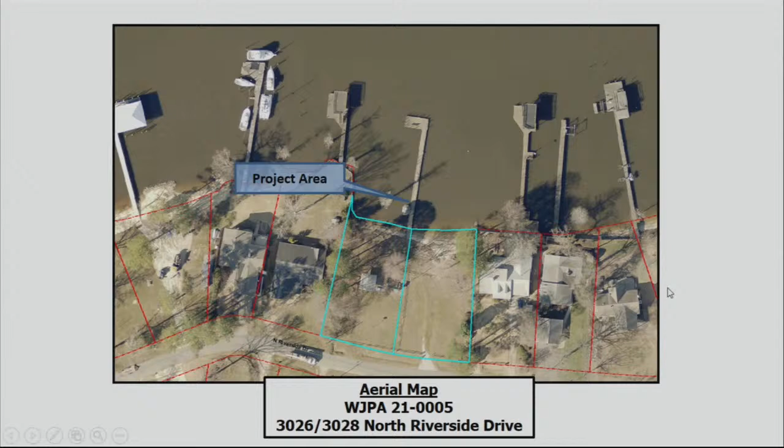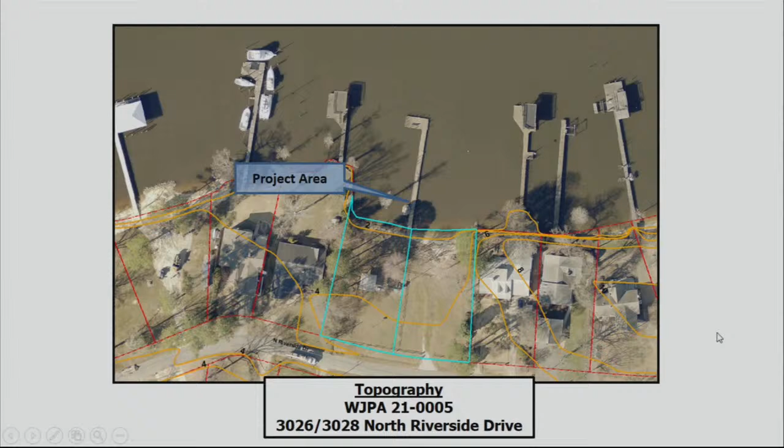Aerial photography of the site shows the existing pier that is underwater for the majority of high tide events. Topography shows the site is fairly flat, with the pier extending into the Chickahominy River, and the floodplain affects this portion of the property.

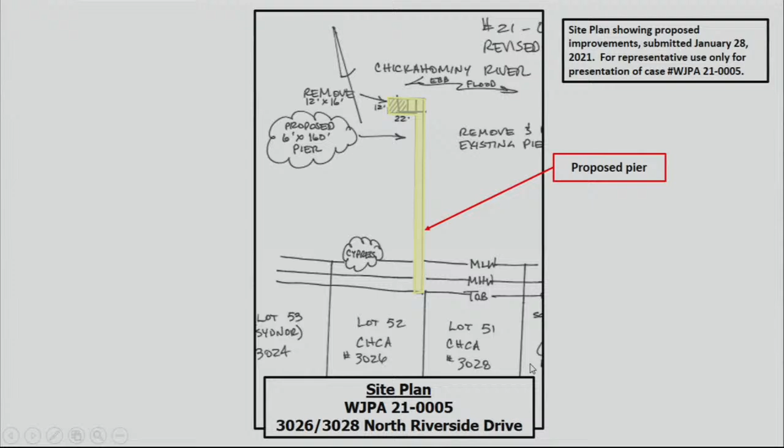A site plan indicating the above proposed construction is shown in yellow, along with site photographs showing the need for reconstruction of the pier, as it is underwater in these photos.

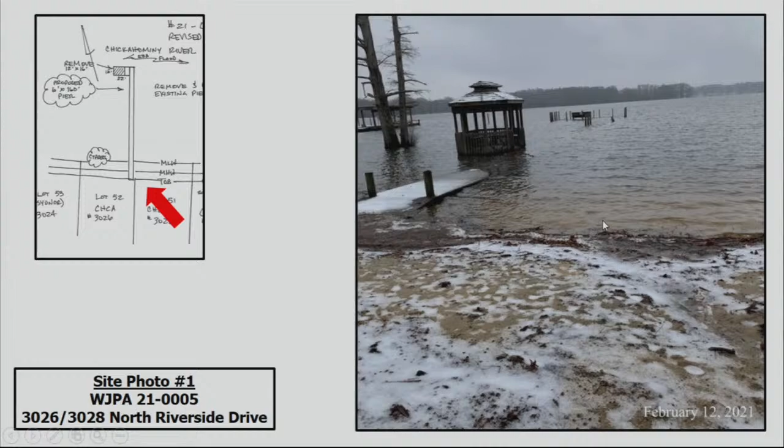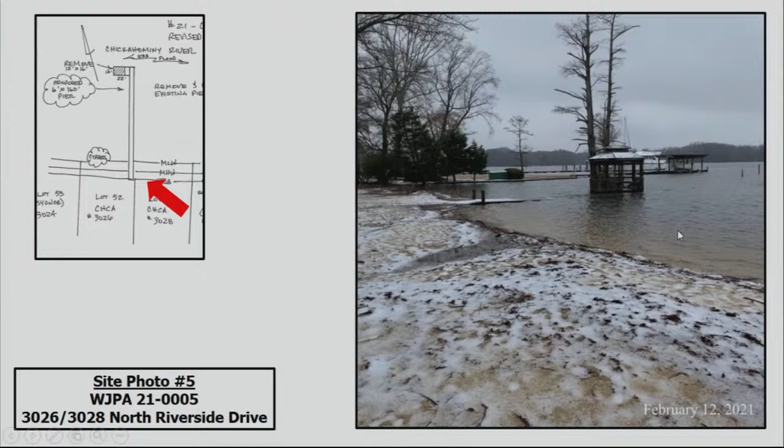Staff recommends approval, given that the applicant obtains all other necessary local, state, and/or federal permits as required for this project, and that all development activities located in the special flood hazard area comply with Article 6, Division 3, floodplain area regulations of the James City County zoning ordinance, and receive all required approvals and permits prior to the commencement of such activities.

This wetland permit will become null and void if not started by April 14th, 2025, with a written request for an extension to be submitted to the James City County Stormwater and Resource Protection Division no later than March 3rd, 2025, which is six weeks prior to the expiration date. Thank you, and I'd be happy to answer any questions.

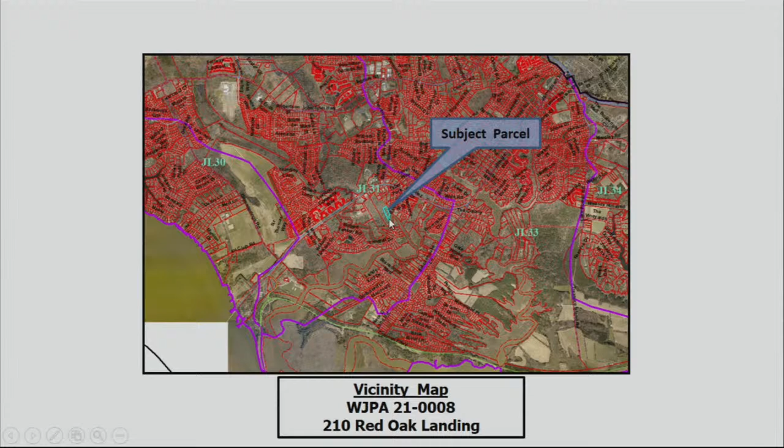I do want to direct your attention to your screen. Their request is to construct a pier on Powhatan Creek of approximately 230 feet in length. The subject property at 210 Red Oak Landing is outlined here in blue. From the aerial map, the area in question tidal vegetation is here, and the upland bank starts about here. The house was built prior to the Chesapeake Bay Preservation Ordinance and is grandfathered into the Chesapeake Bay Act, just for your information.

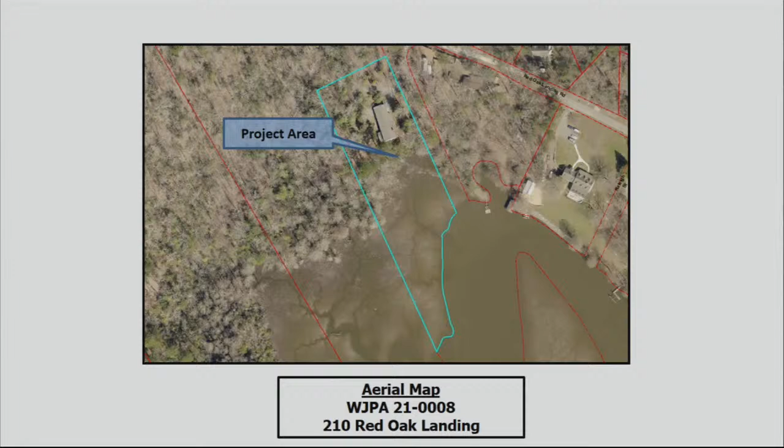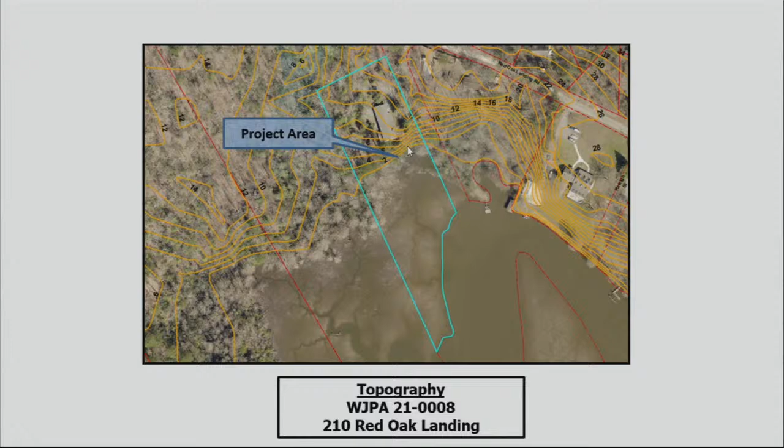Topography as it exists on this site. Again, the toe of the bank, or the edge of marsh, depending on which way you think of it, is here. And the floodplain as it affects the property.

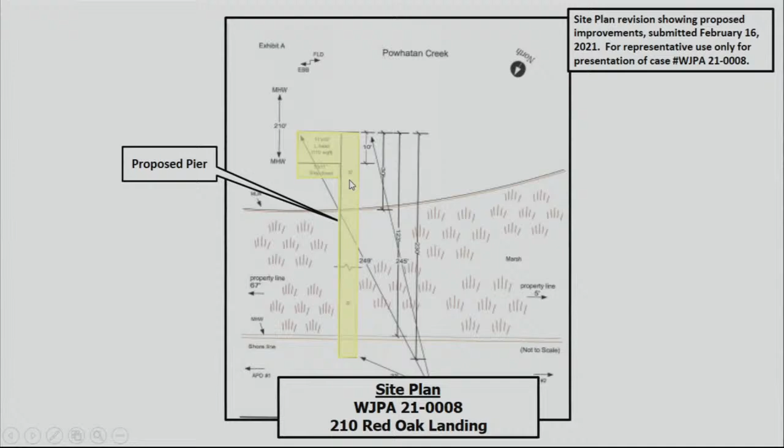From the application, starting at the uplands and then traversing approximately 200 feet of vegetated marsh, and then from the edge of the marsh, projecting out into Powhatan Creek proper approximately 30 feet with an 11 by 20 L-head here, and then a little 5 by 11 step-down platform here to access the creek with canoes and those types of issues. So from the property looking out towards Powhatan Creek, the pier is going to start here approximately and cross. What you can see here is just a mud flat, but it is a peltandra marsh.

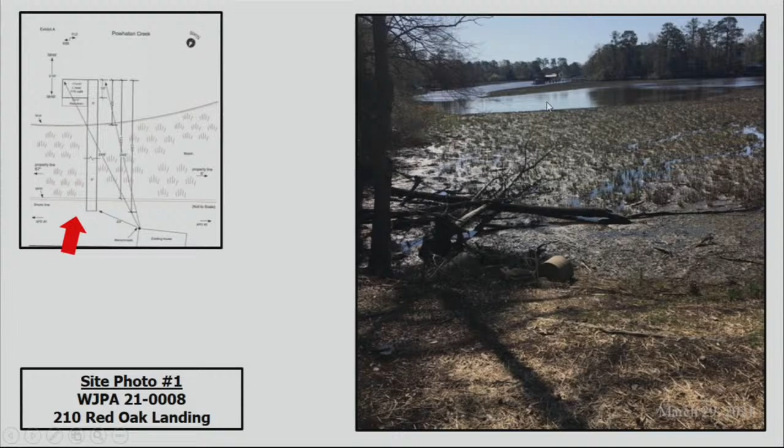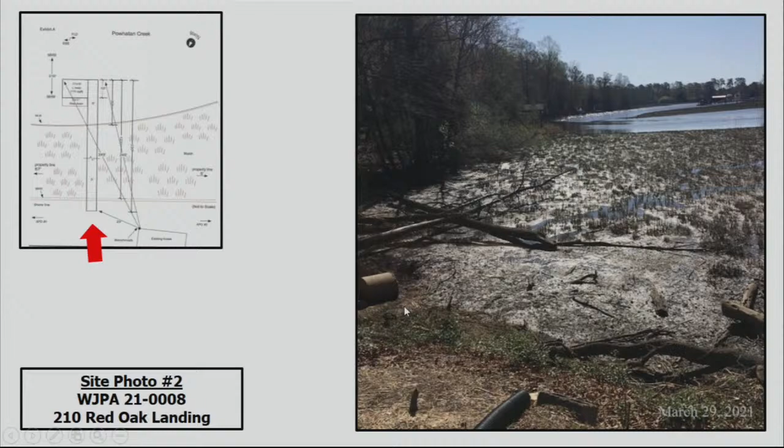And here in the next month or two, it'll be nice and purple with all the flowers. The pier proper will extend out into the creek, approximately where my cursor is. Different perspective, a little further, pier's going this way. And again, from the other property line, the pier's going like that.

Again, it is not the pier construction itself. It is a private single user open pile structure, which is clearly exempt from the Wetlands Board jurisdiction, but it is the manner of construction of the pier that is under the board's purview tonight.

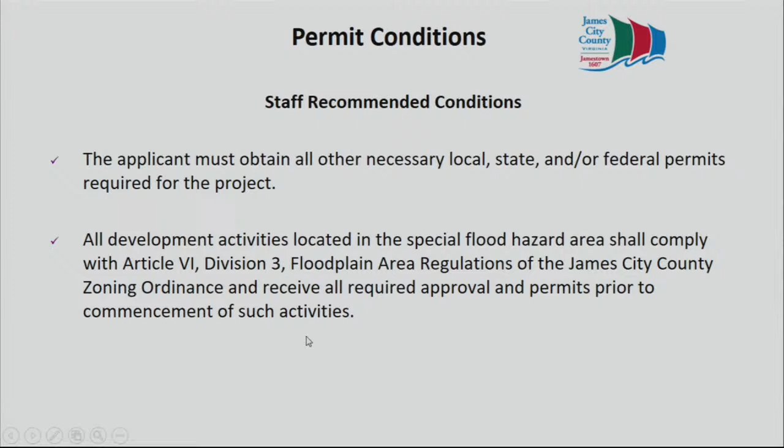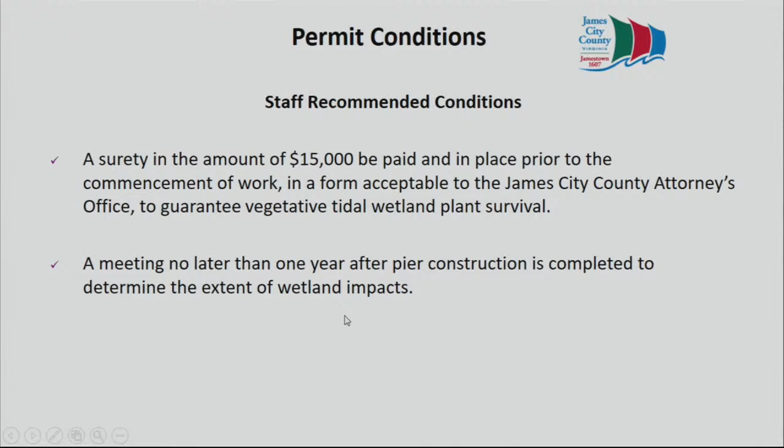Staff, as I said previously, does recommend approval with the following conditions: that the applicant obtain any other necessary permits as required, that the development comply with the floodplain regulations of James City County, that a $15,000 surety be paid to guarantee no net loss of tidal wetland vegetation, that a meeting take place no later than 1 year post-construction to determine if there are any wetland impacts, and that the wetlands permit expire 3 years from tonight's date, with an extension requested 6 weeks prior to that expiration date. Be happy to answer any questions the board may have regarding this application.

David, do you have any questions? No. Bob? Yes, just some fill-in information, I guess. Do you have some idea of the estimate of time the construction will take once they get started? Mr. Lukens, I will defer to the contractor for that question. I do believe he is online as well and can answer that. Any other questions? Not for me.

I have one, sir. Do you consider, if this site becomes infested with Phragmites, do you consider that the destruction of the wetlands?

That's a difficult question to answer. I don't mean to be springing it on you cold like this, but it occurred to me a little while ago that in a situation like this, I would certainly hope that the staff would think that this is one place where you could eradicate Phragmites if it becomes established. I don't see any Phragmites in the slides anywhere, and you know the problem you could get into, but this could certainly be something that you could control and get the native vegetation back.

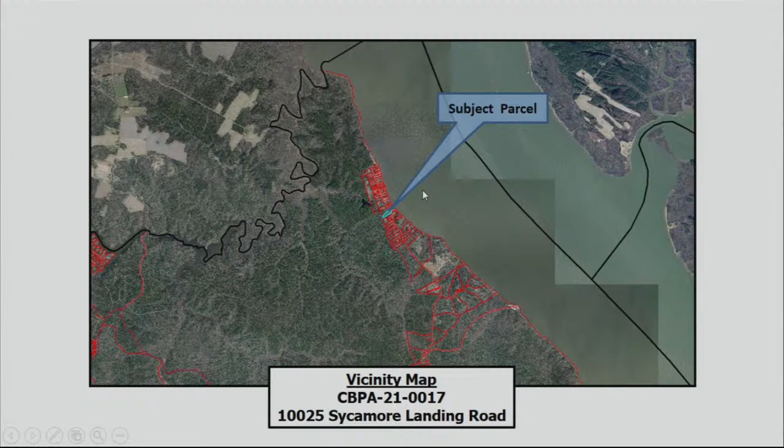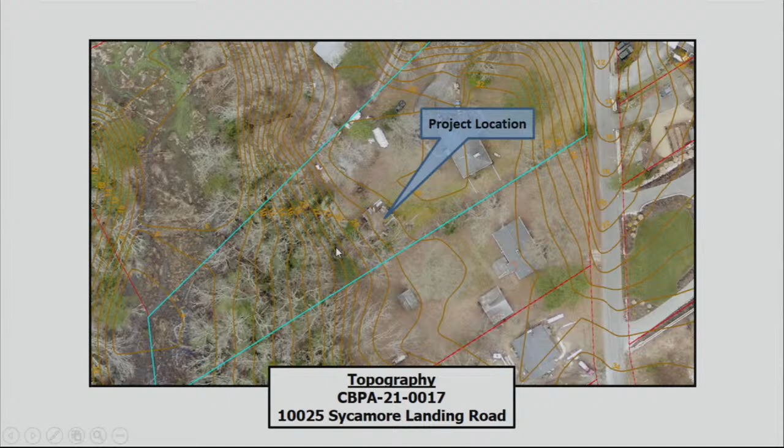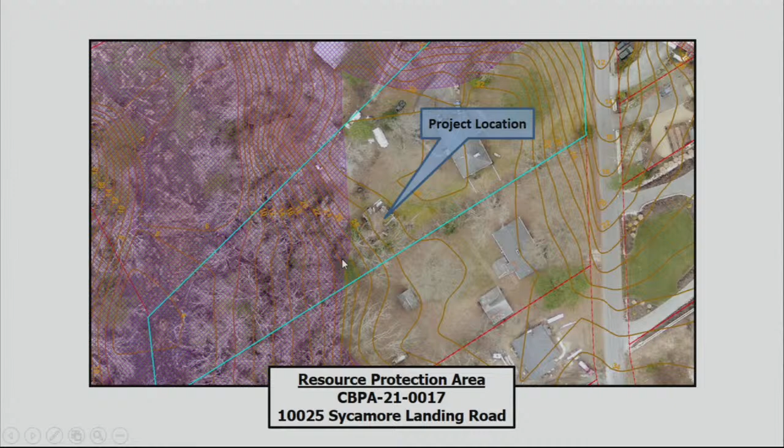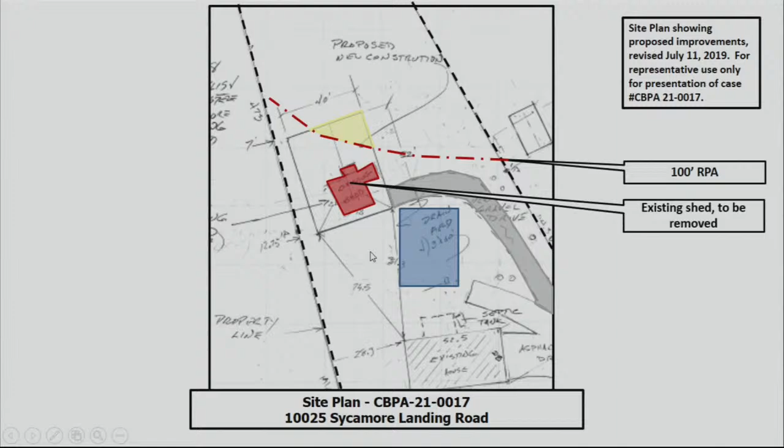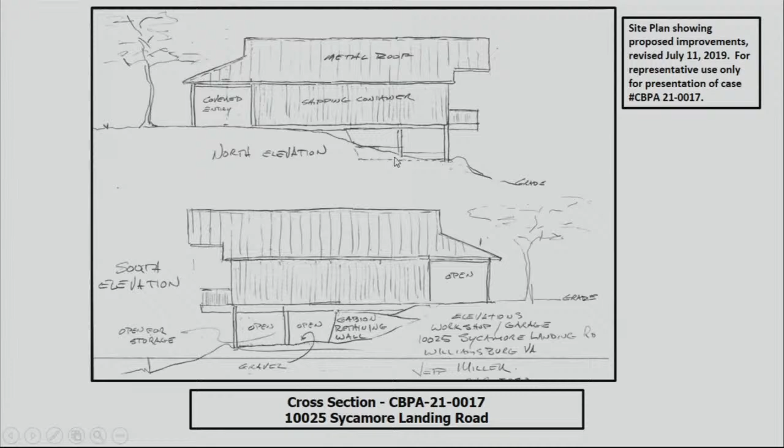The driveway would be accessed through this way, and from the other side, the gabion wall here. This is the area of gravel mentioned previously. From another plan view section, the roof line would capture runoff via an infiltration trench at ground level, capturing all the runoff coming from the rooftop.

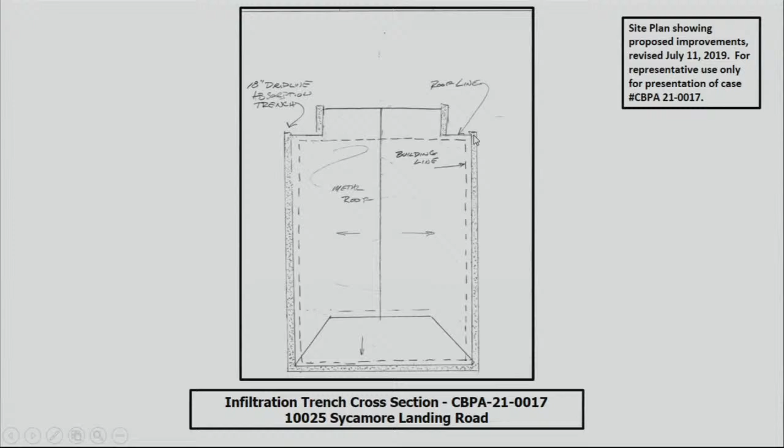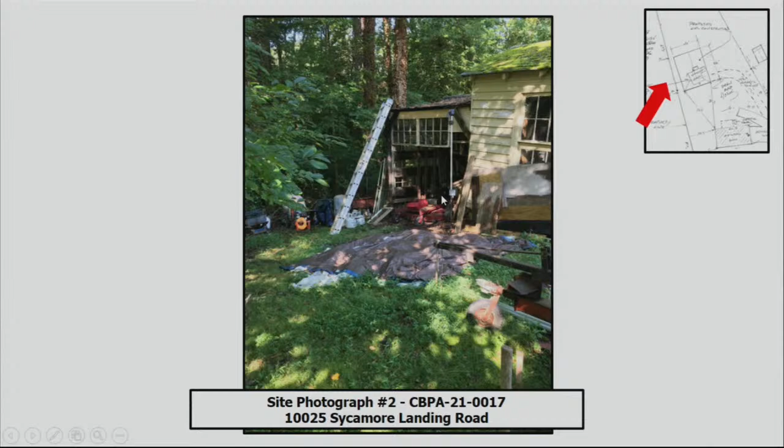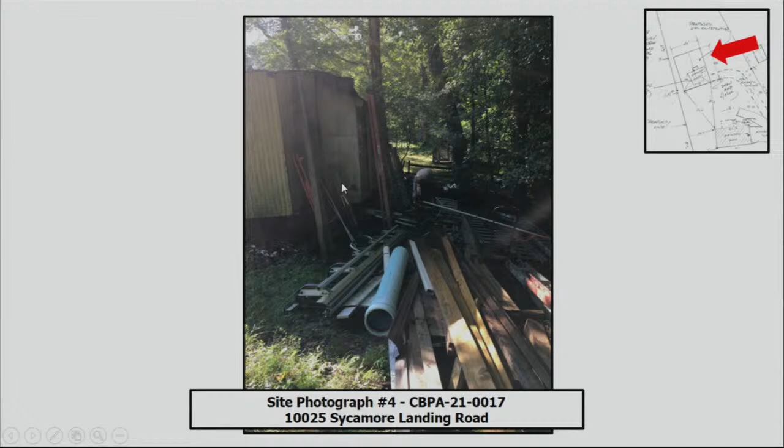This is the existing shed on the property, which will be demolished, and all the material on the ground and within the shed would be stored inside the proposed new garage. Staff does recommend approval and notes that the impacts are minor.

We request the following permit conditions: any other federal, state, and local permits including an erosion sediment control plan and land disturbing permit; submit a design for the proposed infiltration meeting Virginia Stormwater BMP Clearinghouse Design Specification Number 8; that the request become null and void if construction is not begun by April 14, 2022, with extension requests due no later than 6 weeks prior, March 3rd, 2022. Happy to answer any questions the board may have.

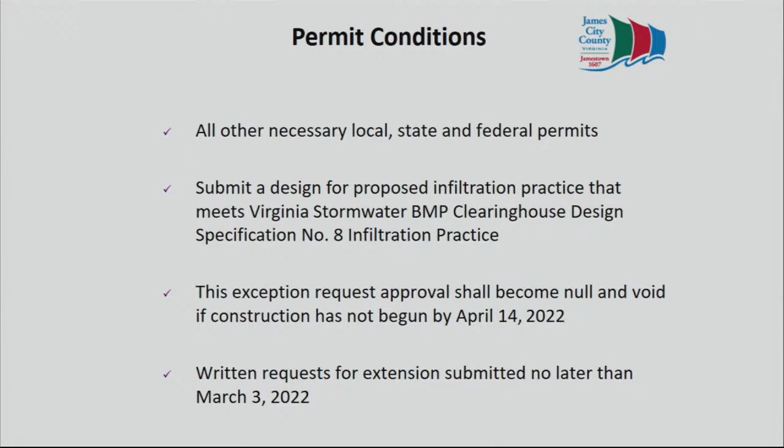Any questions for staff? Mr. Lukens? Mr. Gussman? No. None, sir. Hearing none, we will open the public hearing. Does anyone wish to address the board on this matter?

My name is Jeffrey Miller. I am the owner, builder, contractor, designer, et cetera. State your address for the record. Jeffrey Miller, 10025 Sycamore Landing Road.

Hearing me again, I want to offer apologies to the board. Crazy year. Yeah, projects - my son lives right next door, he has a new room addition on his house, and a new addition to his family, and another one on the way. That took precedence. Good, I appreciate your indulgence, hope everything will go better.

Would this time frame that Mr. Wilson suggested in the permit give you sufficient time to start construction? I believe so. Okay, thank you.

Any other questions? No. Anyone else wish to speak on this matter? Hearing none, I will close the public hearing. The matter is before the board.

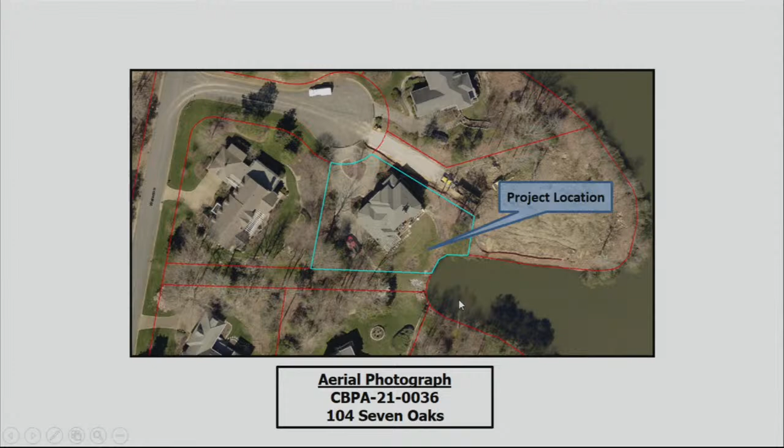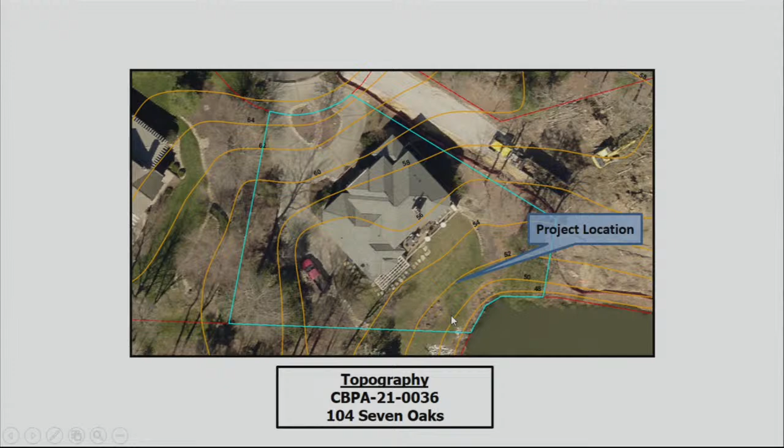Topography of the lot does slope back down towards the resource and does get steeper towards the rear of the property. Sanitary sewer runs adjacent to the property lines. And the resource protection area as it affects this property, encompassing the majority of the existing house.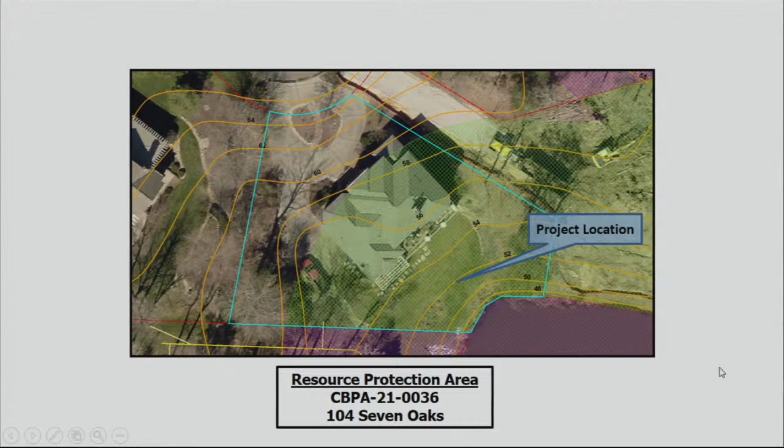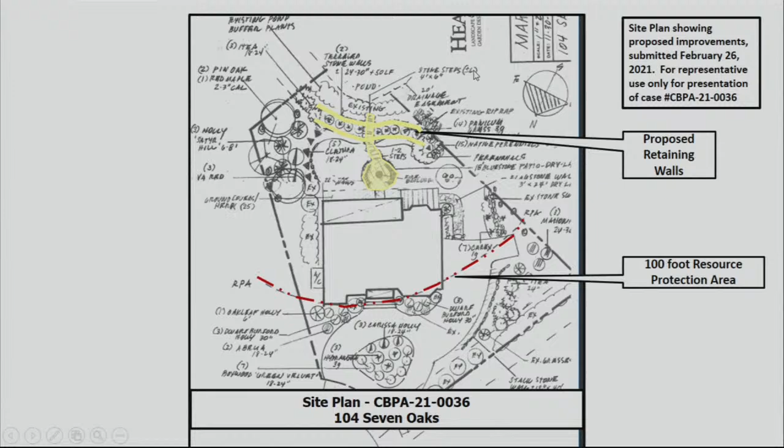Site plan that has been submitted to this department, the resource protection area outlined here in red. The proposed retaining walls here with the pond just adjacent to them, and the proposed patio circling it.

Again, staff does recommend approval of this exception request, given that all other necessary local, state, and federal permits are acquired as necessary. That a surety of $250 be submitted to guarantee the mitigation plantings, and this exception request approval become null and void if construction is not begun by April 14th, 2022, with written request for an extension submitted no later than March 3rd, 2022, 6 weeks prior to the expiration date of this exception request. Thank you, happy to answer any questions the board may have at this time.

Any questions of staff? Just a quick one. You said 2 retaining walls? Yes, sir. So they're parallel to one another? Yes, they will be parallel. They basically just step down the topography. The first one, like each a foot? What's the step down? I am not positive of the elevation change, but I will defer that question to the applicant.

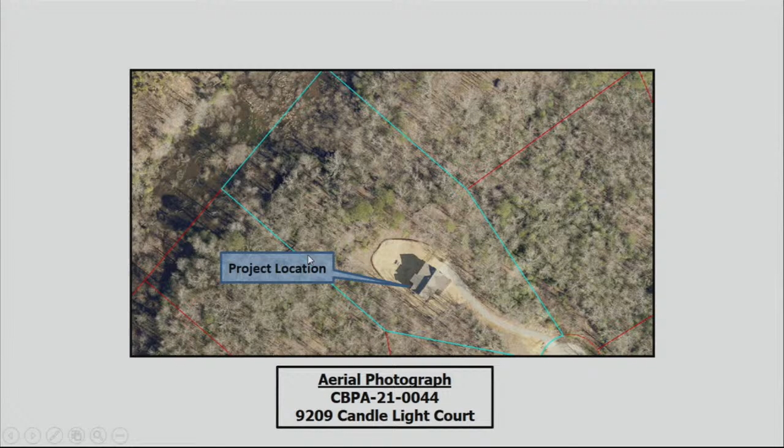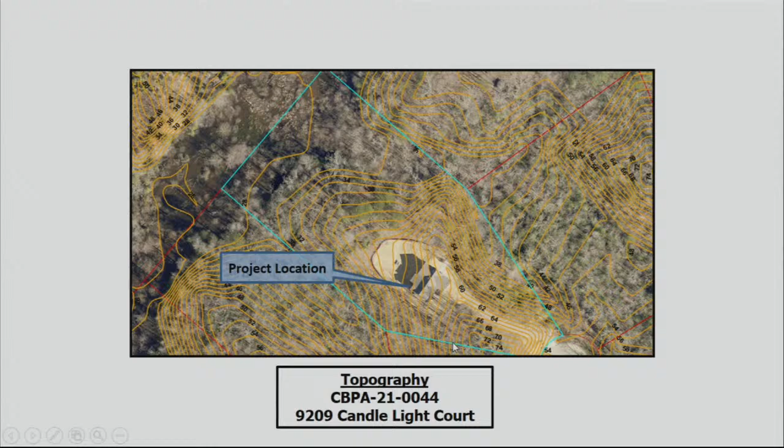Topography as it affects this site, it is heavily constrained by steeper slopes and does have a small island of a flat area towards the middle. The resource protection area as it affects this property, outlined here in green and orange, the area outside of the RPA coming up through the middle of the house.

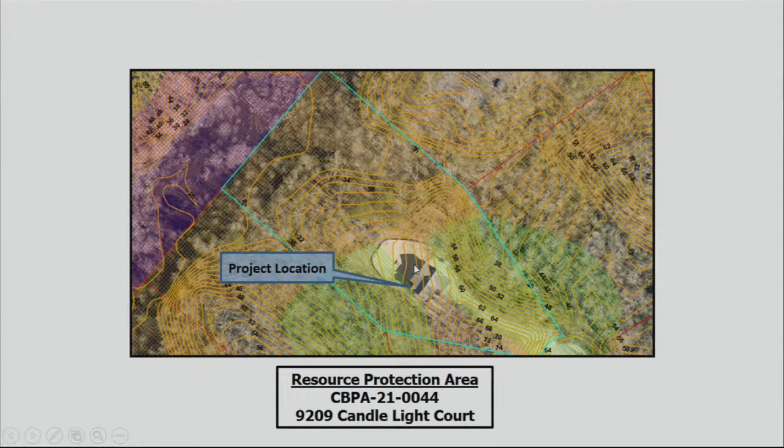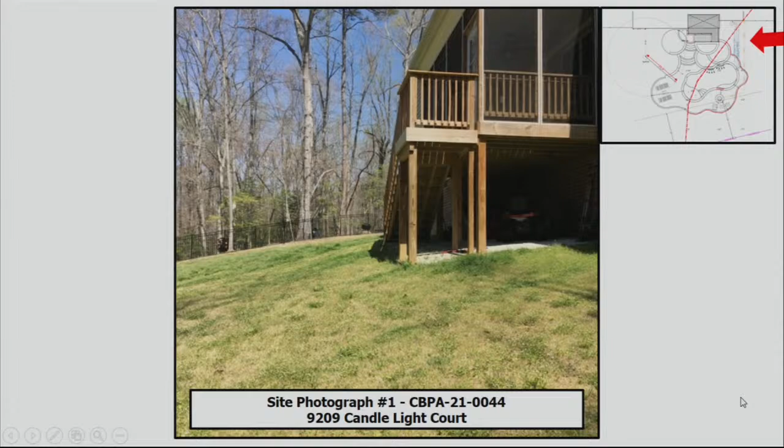Staff does recommend approval of this application request, given that all other necessary local, state, and federal permits are acquired, including an erosion sediment control plan, a land disturbing permit, and a surety. That a mitigation plan consisting of 2 canopy trees, 4 understory trees, and 6 shrubs be submitted to this office. That a surety of $500 to guarantee the mitigation plan is also submitted. And that this exception request approval become null and void if construction is not begun by April 14th, 2022, with written request for an extension submitted no later than March 3rd, 2022, 6 weeks prior to the expiration date of this approval. Thank you very much for your time.

I'd be happy to answer any questions that the board may have at this time. Mr. Long, is the encroachment outside of the footprint of the pool, is that pavers, patio, what is that? It's my understanding that they will be patio.

Concrete? Yes, though I will defer that question to the applicant to further answer. So the pool up there, is that peanut-looking shaped? Yes, it is this shape here, with everything else around it being the patio area. Everything is within the yard, is that correct? It is all within the yard, yes, sir.

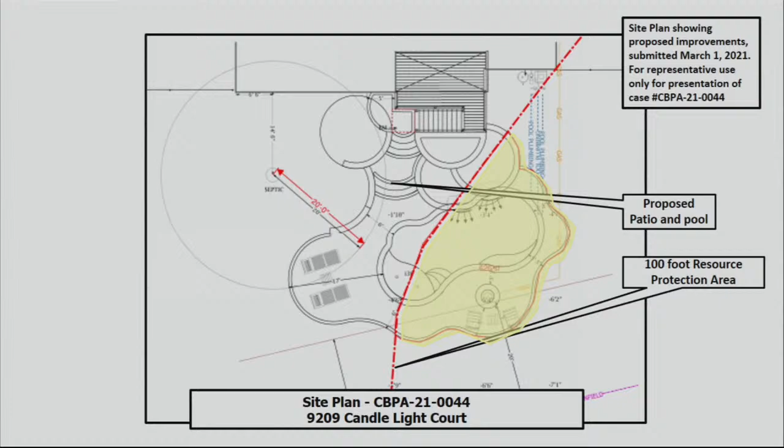Thank you very much. Are there any other questions of the applicant? Thank you. Thank you. Would anybody else like to speak on this case? Hearing none, we'll close the public hearing.

Open for board discussion. I can appreciate Mr. Wilson's comment about the potential implications of infiltration next to a drain field. Still think this is a lot of impervious in the buffer. I would have appreciated that been addressed more directly in the application, just throwing it out there. Comments well taken, sir. And I also share the view that it would have been good to have some infiltration there, but that the drain field, I think, pretty much negates anything we could do there. So I'm prepared to vote for this, sir.

Mr. Gussman, Mr. Lukens, any comments?

No comment. All right, I'm open for a motion.

Mr. Chairman, I'd like to make a motion that the board vote to adopt CBPA-21-0044, Candlelight Court Pool. We have a motion on the floor to adopt the resolution to grant the exception.

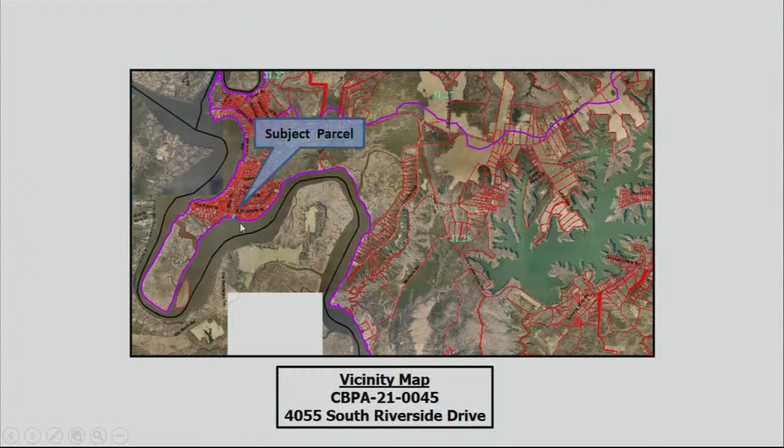Brief presentation above. Again, the applicant requests to construct a house addition on property located at 4055 South Riverside Drive, outlined here in blue within the Chickahominy Haven subdivision. Aerial photography showing the house in question and the area for the expansion.

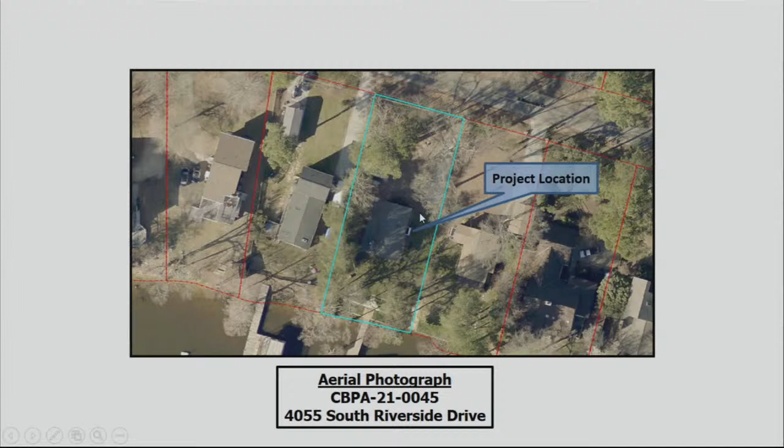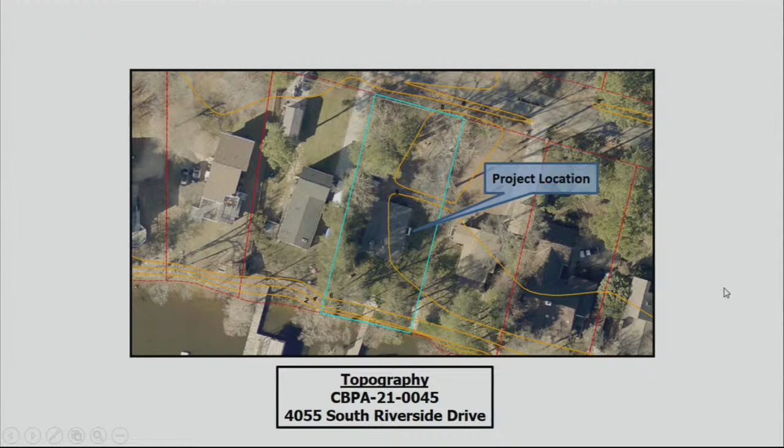Expansion is on the side of the house? Yes, sir. It's going to be on both sides of the house, and on the front of the house, facing towards the road. So it'll go outwards and forwards. Nothing towards the river? That's correct, yes, sir. Nothing towards the river, all outwards and forwards towards the road. The floodplain, as it affects this property, is heavily constrained.

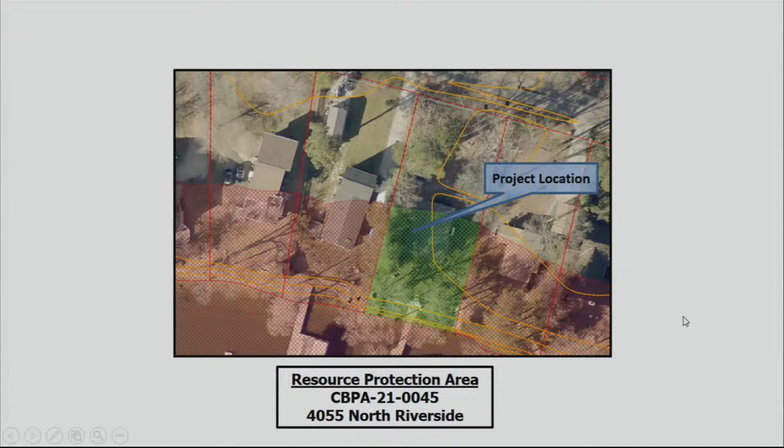And the resource protection area affecting this lot, half the lot does get encapsulated by the RPA. There should be a site plan, but it seems to have been removed. In the right-hand corner, the site plan shows there is an increase of impervious area on the sides of the house and coming towards the road. Some photos from the site show the area of increased impervious area and the gravel, the majority of which the expansion is covering.

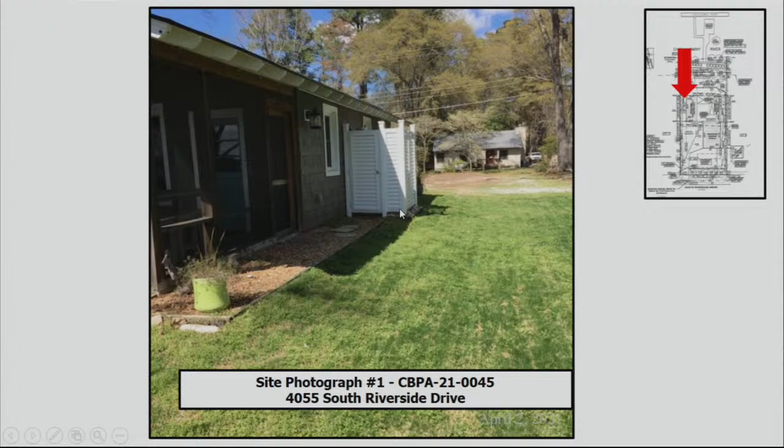The other side of the house, which also will have an increase and an expansion. And the front of the house, which is proposed or is included in this proposal.

Staff does recommend approval of this application request, given that all other necessary local, state, and federal permits are obtained as necessary. That a surety of $250 be submitted to this division to guarantee the mitigation plantings. And this exception request become null and void if construction is not begun by April 14th, 2022, with written requests for an extension submitted no later than March 3rd, 2022, six weeks prior to its expiration date. Thank you very much, and I'd be happy to answer any questions the board may have at this time.

Mr. Lukens, Mr. Gussman, any questions for staff? No questions. Very good. Thank you very much.

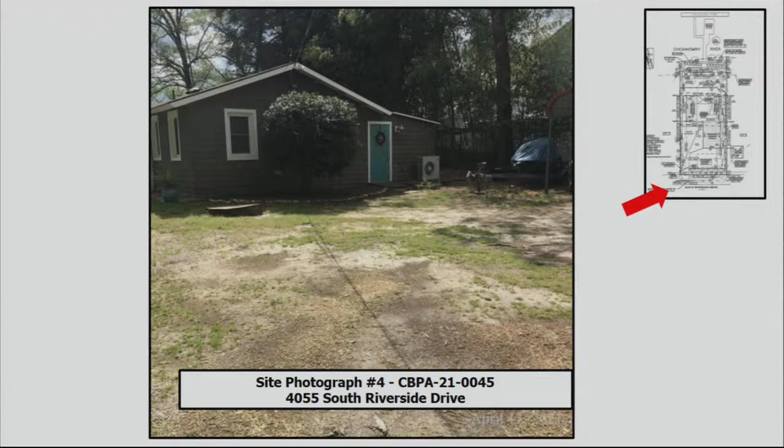Just curious, are you elevating the living structure or are you keeping it at grade? I mean, the new expansion. Yes, it's on a... what do you call it... slab. And we are not at that point yet to know what's recommended, whether to elevate it or not. It is actually not in the flood zone, I think, because we're very fortunate that this is one of two lots that has never flooded in the Haven.

If you drive down the street, you'll see flooding, but this has never had flooding. These are one of the original three houses in the Haven. They're all lined up, all on higher ground than anywhere else. Fortunate. The water's never gotten even in the front yard. So the picture you had where it was showing green versus blue, they're in the green.

Yes, Mr. O'Brien, I can explain that floodplain picture to you. The green is X-shaded zone, which we don't regulate. The Woolhams are correct, they are outside of the floodplain. They do not have to meet minimum freeboard requirements, although it is a discussion staff is going to have with them at some point just for a safety factor, but they are not required to elevate their structure.

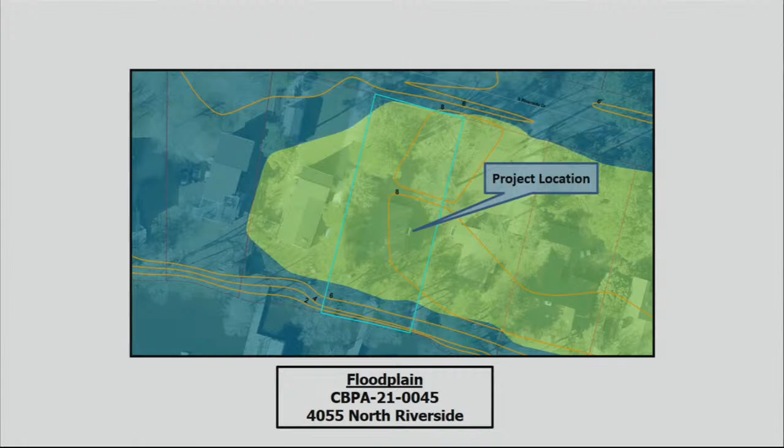Since I didn't see a site plan in the presentation other than that small view, could you verbally describe it? You're going to go sideways on either side of the house, 5 to 10 feet? I brought it with me. It is. Because I think it's 16 feet if you're facing the river, 16 feet to the left, 8 feet to the right. Okay, and then the majority of the encroachment is on the street side of the home.

We're going to go up. Oh, up. No, when you say encroachment, you mean in the RPA? Yeah, it's to the left that's the majority, because the entire cottage is in the RPA. Yeah, so that kind of makes it a challenge. Oh, thank you.

A little difficult to read.

Know the history of the property, who built the house? You know who built the house? I know about the property. Ruggles? I was there when the bulkhead was put in and everything. You're right, it's the fact that it does not flood. You're absolutely positively right, and it's the highest point there is in the whole subdivision until it lets you come around on Richmond Drive on the other side. On that side of the river, that's the highest point there is. I think there were two, from what we understand, two NASA scientists that went in way back when and plotted out the land, the one next to us and ours. I think Mr. Apperson's in the know. I think he knows. Oh, good.

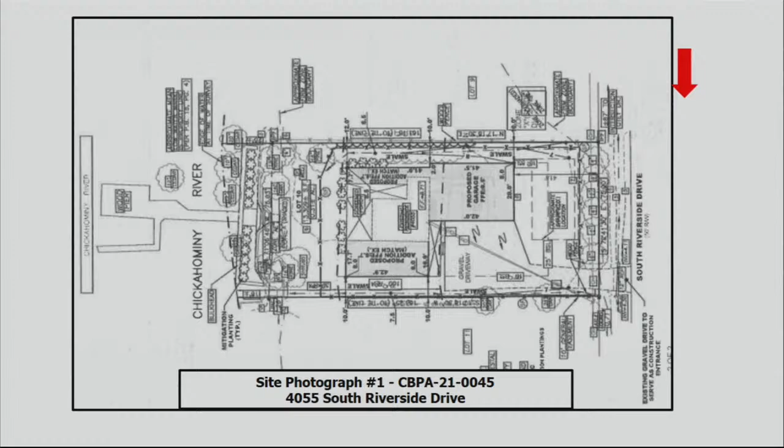Any other questions of the applicant? Thank you. Would anybody else care to address this project? Hearing none, I will close the public hearing. The matter is before the board.

Good. Do I have a motion? Motion to adopt the resolution to grant the exception for Chesapeake Bay Board case CBPA 21-0045 at 4055 South Riverside Drive. We have a motion to adopt the resolution to grant the exception. Mr. O'Brien? Yes. Mr. Roadley? Yes. Mr. Apperson? Mr. Gussman? Yes. Mr. Lukens? Yes. The motion carries. Thank you.

Next case is CBPA 21-0047 at 208 Monifieth, single-family dwelling and deck. Mr. Wilson.

Good evening, Mr. Chair, members of the board. Mike Wilson here, Resource Protection Section Chief, here to present case CBPA 21-0047 from Omega Development at 208 Monifieth in the Fords Colony subdivision. Mr. Matthew Roth of Roth Environmental has applied for a Chesapeake Bay exception on behalf of Mr. Marty Mather, Omega Development, for encroachments into the RPA buffer for the construction of a new single-family dwelling and deck on property located at 208 Monifieth within the Fords Colony subdivision and Powhatan Creek watershed. The property is further identified as James City County Tax Map Parcel.

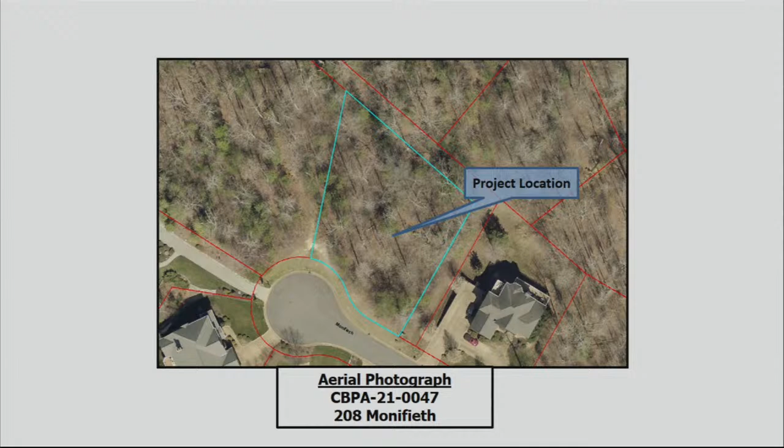If you would direct your attention to your screen, their request is to construct a single-family dwelling and deck at 208 Monifieth within the Powhatan Creek watershed and the Ford's Colony subdivision. It is outlined here in blue on this vicinity map. From the aerial photograph of the property, the site is currently wooded.

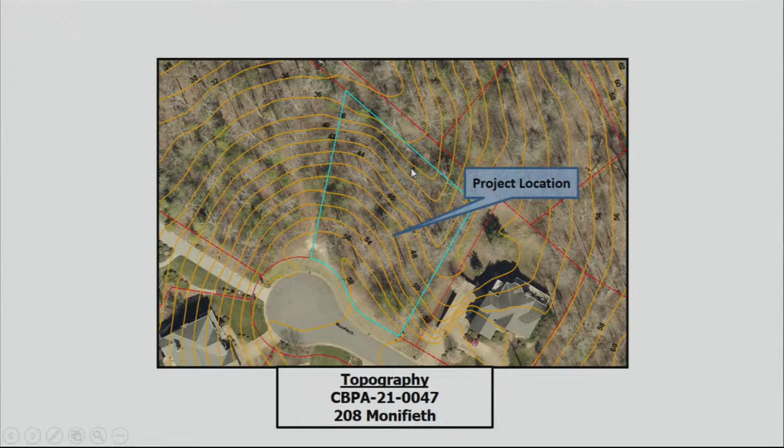Topography of the site: it slopes from the cul-de-sac down to the rear of the property, fairly consistently and fairly significantly. Sanitary sewer is available for this property; it runs along the side of the property in a JCSA easement.

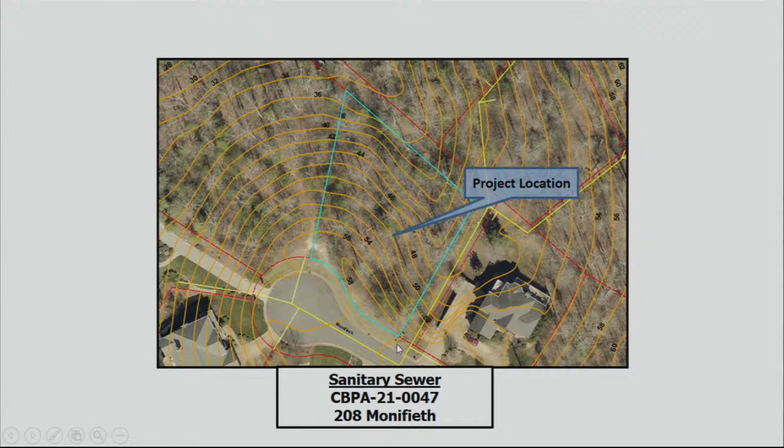RPAs affect this property, shown here in gold, from about a quarter of the way into the property all the way to the rear. From the site plan, Mr. Roth did a wetland delineation of the property. That confirmed wetland line is shown here, highlighted in blue. That line was offset 50 feet to here, and then an additional 50 feet to get the 100-foot buffer. The reason I make that distinction is because when the lot was platted, any impacts in the seaward 50-foot buffer for the principal structure must be approved by the Chesapeake Bay Board.

The total impacts to the RPA are shown here in yellow. Approximately 1,000 square feet of those impacts are within the seaward 50-foot RPA, and 3,200 square feet of impacts would be in the landward 50-foot RPA.

Also shown here in green are the two stormwater BMPs they are proposing. They're bioretention and will infiltrate water. They also have an underdrain system in place just in case, due to high groundwater, seasonal high groundwater that might occur on the property as evidenced by the wetland system. The outfall for those underdrains would be here, right at the head of this wetland system.

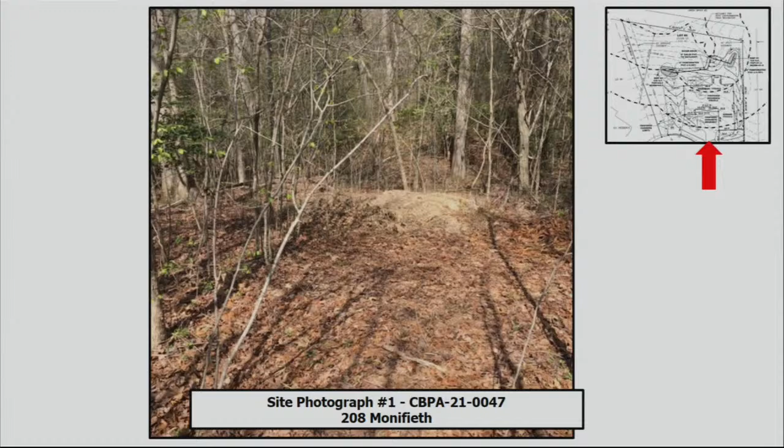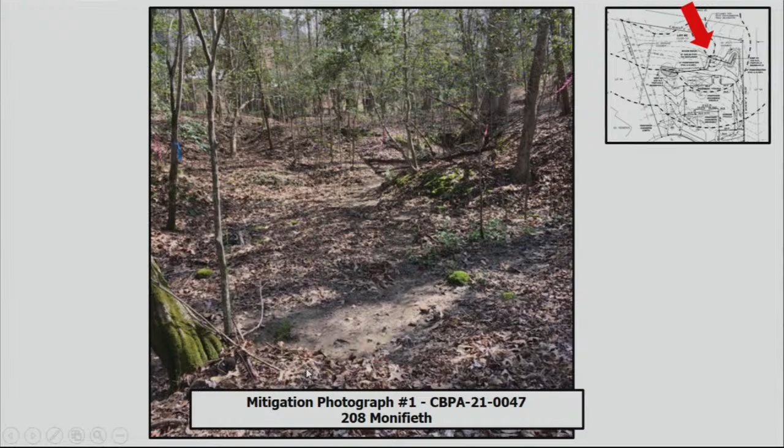A couple site photographs from the cul-de-sac looking into the lot. This is at the front of the lot near the sanitary sewer easement looking into the lot, and then from the opposing side looking up into the lot. You can see the significant topo here that this lot has. The BMP outfall would be in this general area, with this being the wetland system. Again, looking up into the lot from the wetland system, one of the stormwater bioretention basins would be in this area, outfalling over into this area.

Again, staff recommends approval. We do want to note that the impacts for this project are major, and we recommend approval with these conditions: that any other necessary local, federal, or state permits are obtained; that the bioretention BMPs follow the standard and spec outlined in the DEQ manual, Specification Number 9; that a surety of $5,000 be submitted to guarantee the mitigation plantings and BMP installation; submission of the bioretention BMP as-built; and that the request be null and void if construction is not begun one year from tonight, April 14th, 2022, with a written request for an extension submitted no later than six weeks prior to that expiration date, March 3rd, 2022.

I'd be happy to answer any questions the board may have regarding this application.

Questions for staff? Staff recommends approval. I assume you've put a lot of time into studying the mitigation, the retention ponds, the wetlands, everything. Yeah, it all meets the requirements, sir.

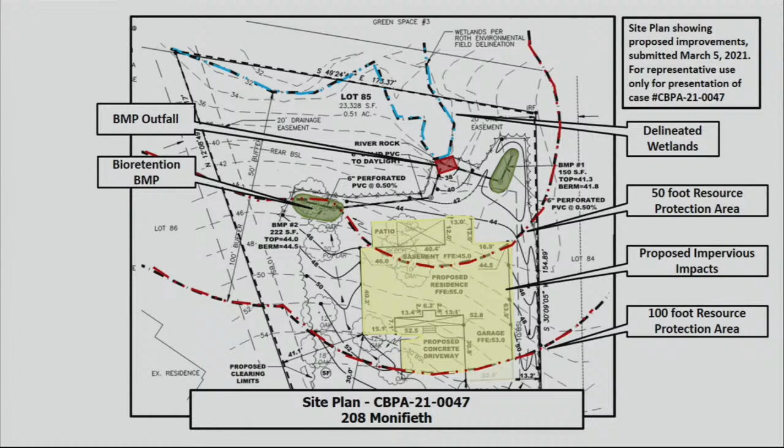Mr. Wilson, is there an O&M plan that goes along with these BMPs? An operations and maintenance plan? No, we did not require that. Thank you.

Mr. Gussman, Mr. Lukens, any questions for staff? None from me. Yes, I have, looking for a little information.

The road access, as far as I can see from the site plan - I didn't bring up any additional contours or anything like that - but it appears this may be a low area in the roadway. I note the site plan shows a couple catch basins on the upper side of the property, and I'm wondering about the capacity of these catch basins and whether under severe storm conditions we would have additional flood from the uphill side, and whether that's taken into account in the planning.

We can ask the applicant that question. So your question was specific to the two BMPs shown on the screen? The actual catch basins noted that are in place, I assume, on the roadway where it says... talking about the roadway inlets. Oh, yes, on the inland side.

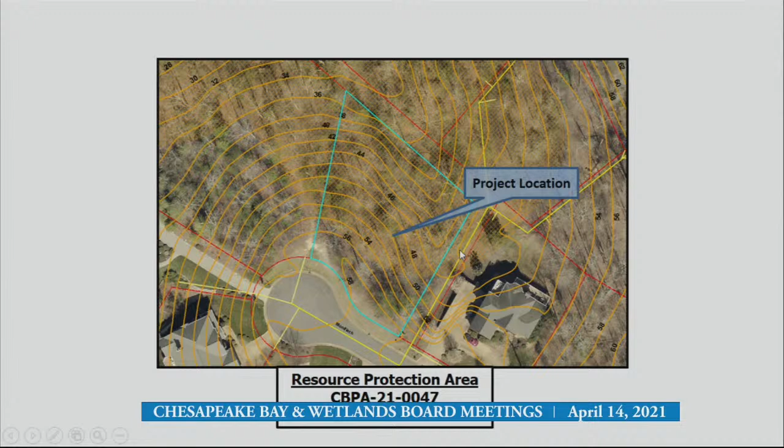Yes, all the water that comes onto this lot is basically rainfall. There may be a little bit coming from the lot to the right, and a little coming this way onto the lot. We would not be intercepting that with our catch basin — it would just continue to flow in its natural direction.

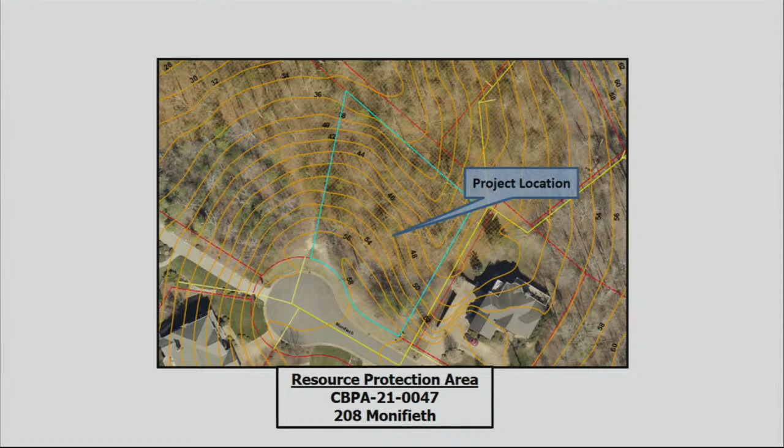The wetlands are all found down at the toe of the slope. If you can go to the site plan, please, with the blue wetland line — there's a small head cut right here. This is not a stream, but there was a drop in elevation of about 2 feet in this area, which made for a nice little outfall spot without impacting wetlands. So that is the most southerly point of the wetland system that brings that RPA buffer onto the site.

The major constraints on this lot as far as development go — the 10-foot building setback limits became kind of null and void. They really weren't affecting where we could build the house on this lot. It was the 30-foot building setback off the road and then the RPA buffer coming from the north.

The 30-foot building setback limit parallels the cul-de-sac. We're right at the beginning of where the cul-de-sac flares out. So in this part of the lot, we're basically where the tip of the garage is. We're right on that building setback that parallels the road. As we get to this corner, it starts to follow the radius of the cul-de-sac, and the other building setback limit is right on this point of the house.

So if we were to shift it — we've twisted and turned and done what we could to see if we could come up with a smaller footprint for the house — but in moving it to the left, we basically increased the encroachment into the seaward portion of the buffer. So we were trying to stay as much as we could in that landward section.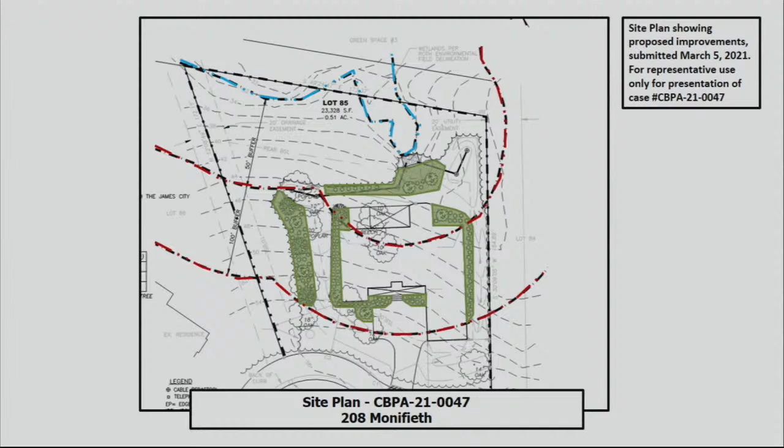Any questions of Mr. Roth? Mr. Gusman? Mr. Lukens? Nope. Thank you, Mr. Roth, for your response. Did I answer your question? Yes, sir. Okay, just wanted to make sure.

Do you have an operations and maintenance checklist or plan for these structures once it's turned over to an owner? We use the DEQ required plan for it. I get it from the engineer, and I don't know if there's an actual schedule they're supposed to follow. I think there is.

I just know that once these become part of a private property, it's out of sight, out of mind, and sometimes people just don't know. That may be a good thing for us to offer, and staff to maybe require as part of these small BMPs, because once they're built, unless staff or inspectors check them every so often, they just go by the wayside or don't function as proposed.

That's one of the reasons we try to go with larger BMPs if we can combine it. In this case, it just would have taken up all the room right behind the house, because the larger ones are easier to maintain and check than the smaller ones.